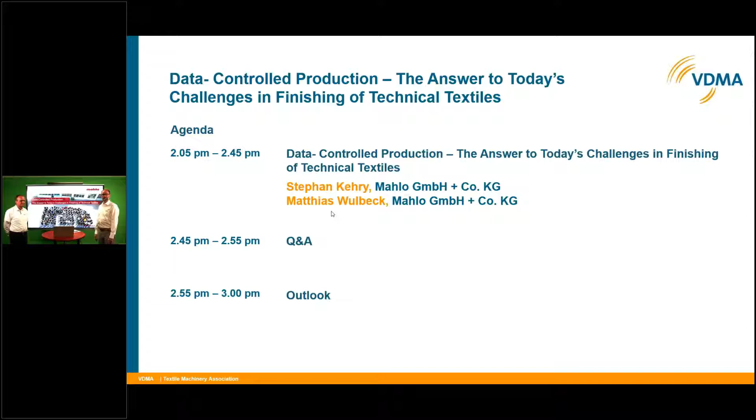Thank you very much, Mr. Bogun, and hello and servus from Bavaria. May I introduce my colleague, Mr. Matthias Wulbeck. He is in charge of product management here at Mahlo for the QMS business, and I'm very proud to have him next to me because he knows everything about QMS. Thank you, Stefan. And my name is Stephan Kehry. I'm in charge of the textile part of the product management, and together we want to introduce this topic about data-controlled production to you today.

But as usual, I think it's well-known business that first we have to introduce Mahlo a little bit, because there might be a few people who don't know Mahlo that well.

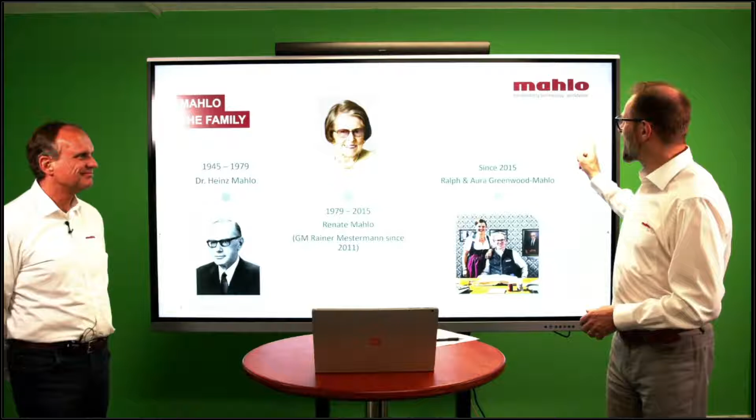Some benchmarks, quite important: in 1948, we already started with process control. It was the first process control in the history of textiles. At that time, it was the measurement of the residual moisture and the closed loop system, which controls the speed of the stenter to make sure that you always have the right speed. Then in '59, perhaps the most important innovation in the history of textiles, the weft straightener, and in '95 we started with the QMS, the quality management systems, and it was so successful that in 2018 we already built an all new production facility for that quality management system.

We have the online measurement and control of basis weight, moisture, thickness, and density. And Matthias will tell you a little bit more about those details. Thank you, Stefan.

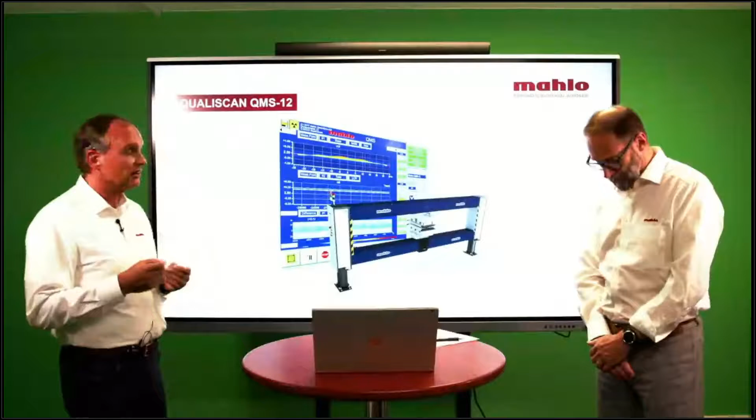So I have the pleasure to talk about the web gauging system QualiScan. QMS is the brand name, and this system works for online measurement with sensors that move over the entire web.

Today we will show you what you can do with it and what the sense of it is. Let's take a brief look at the current political situation in the world. I do not want to lose too many words about it, but the corona disease is still affecting our global supply chains. We have bottlenecks in many machine components, and important for you, in many raw materials, especially coming from Asia. The transportation possibilities are very limited since many harbors and seaports in China and the Far East are still in lockdown.

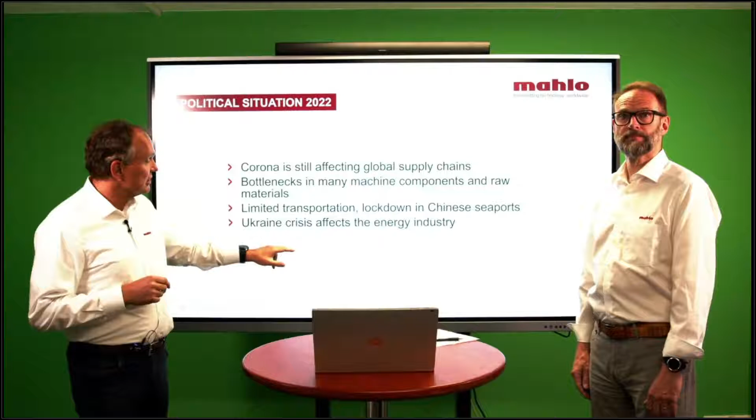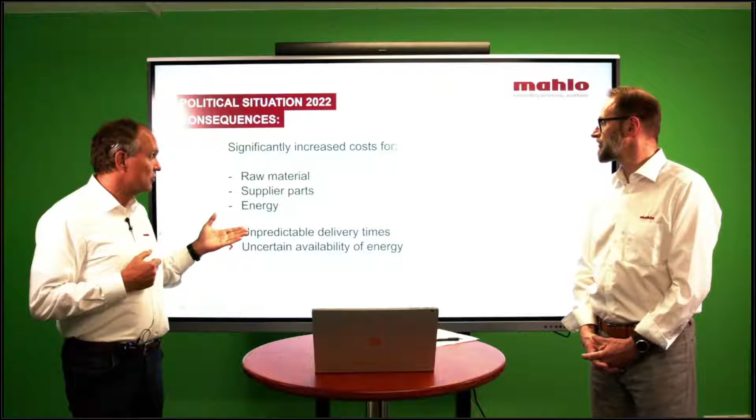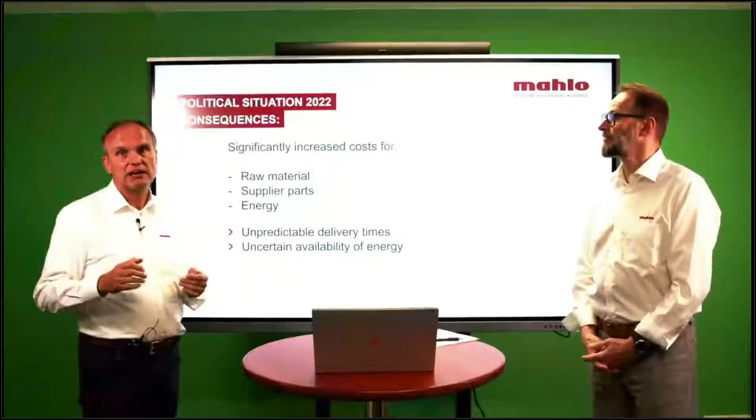And the latest Ukraine crisis affects the energy industry. The result is that we have to face significantly increased costs for raw material and supplier parts, which affects our machine business mainly, and energy. And this is not enough. We have unpredictable delivery times and great uncertainty of the availability of energy in the future. What happens if they cut down the gas supply completely? Nobody knows what will happen then.

So the savings of energy and raw material have always been a very important topic, and it's more important today than ever before. Climate protection, of course, is the biggest issue, but in the meantime we have to consider as well the economic survival of the manufacturers themselves.

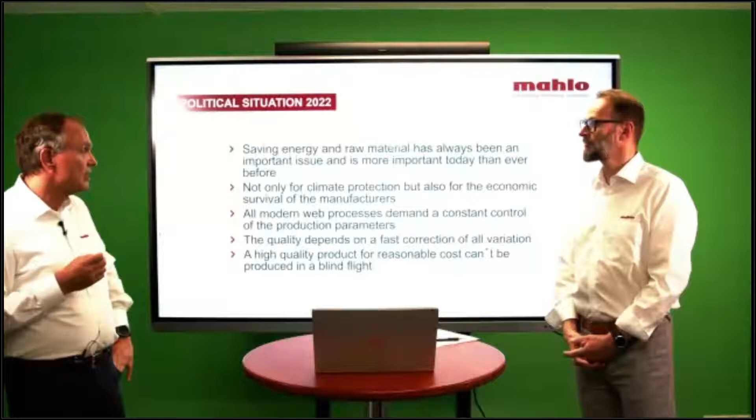For this reason, all modern web processes demand constant control of the production parameters. The quality depends on fast correction of all variation, and a high quality product for a reasonable cost cannot be produced in a blind flight.

What can we achieve with an online quality control? First of all, we are able to minimize the energy input down to a minimum. Another point is that we achieve the product quality with a minimum of raw material. We avoid bad quality and rejects. So we optimize the machine utilization, and we avoid double work and time for the reproduction of the rejects.

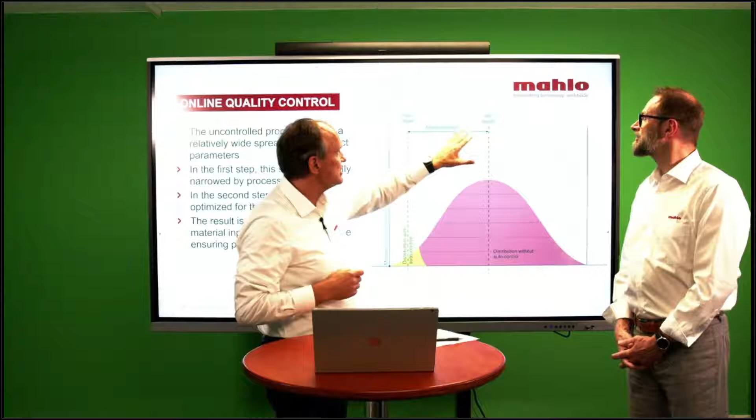And the difference of this is the material that we can save with the active online process control.

An example from the non-woven production: let's think about a needle punched non-woven, which comes from the card and a cross lapper. Here the red profile shows us a very typical situation of an uncontrolled process. In the edges of the web, we have more fiber material because the cross lapper brings more fibers into the edges left and right, and the result is such a bathtub profile, or also called a smile profile, with some big deviation inside, for instance with a CV value of 5%.

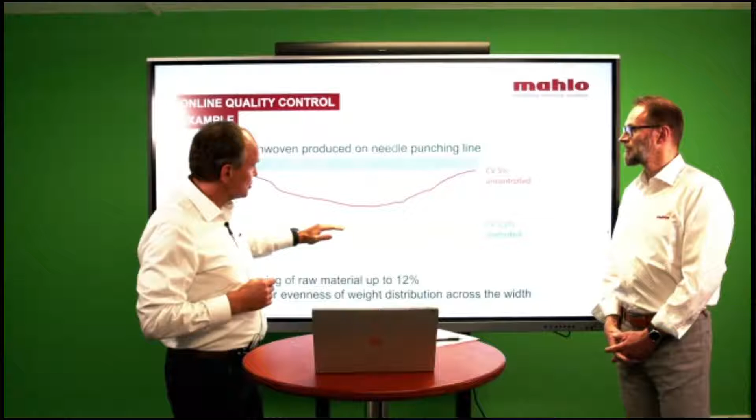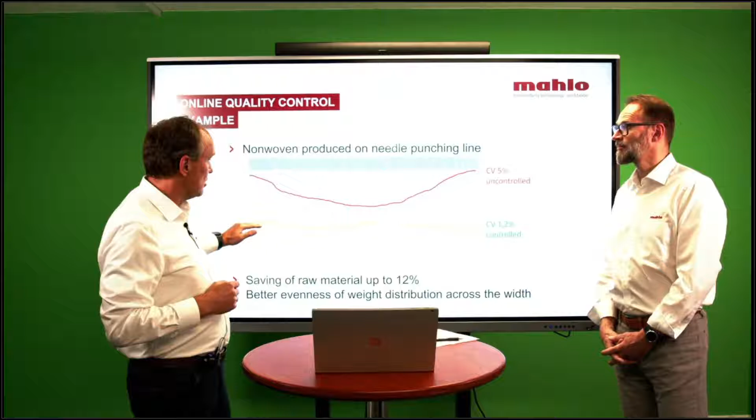By using an automatic measuring and control system, we know the cross profile of the weight very well. We submit the data to the machine control, and we achieve a very smooth cross profile over the entire width with a very good CV value. In addition, we can lower the total target weight value to the minimum, and the material savings go up to 12%. So we have a much better product with high uniformity and high material saving in this case.

Another process is spun lace non-woven, which includes also a drying process. In that case, we typically measure the basis weight profile in combination with the residual moisture after the drying. What does this mean? When we know the residual moisture, we can control the input energy exactly to the minimum. There is no need to over dry the web in case of preventing problems like mold in the final product, so we make sure that our product leaves the machine with the right residual moisture.

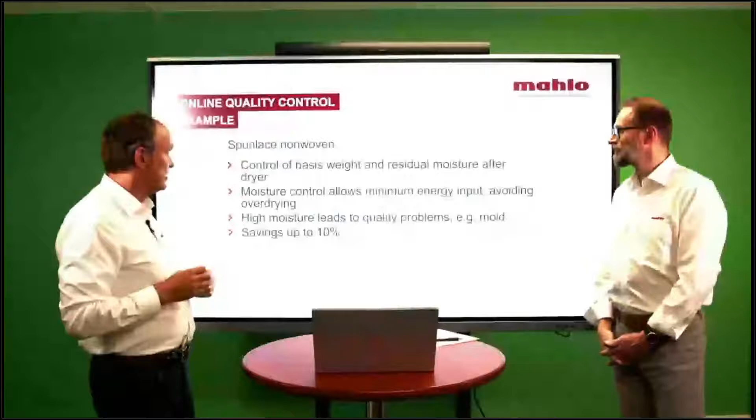And even here we achieve savings up to 10% in energy.

But the most important thing is the sensors themselves. So what can we control, what can we measure online? Basis weight is the most common type of measurement we use, and for this we have beta and X-ray sensors. We offer moisture sensors based on infrared and microwave, product thickness with laser or shadow thickness. For all filter material, we have an Air Permeability sensor in our program, and we can detect single components of the material mix as well.

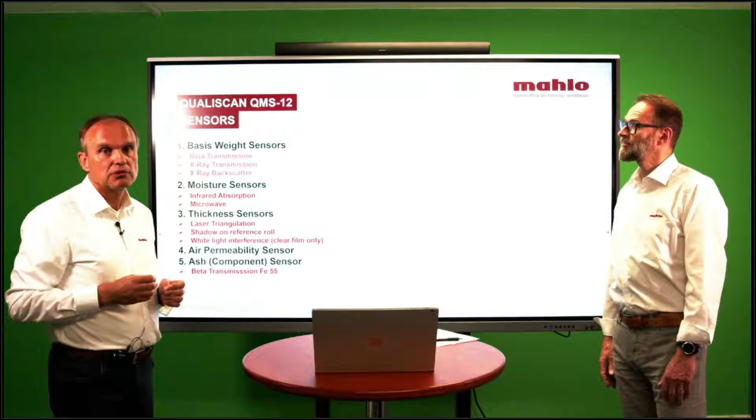Let's go briefly through this selection of sensors used in non-woven industry as well as textile coating, for instance. The most common system is the basis weight sensor based on beta gauge.

This uses a radioisotope, krypton 85 or strontium 90, a very old technology, very easy to handle, and achieving very stable measuring results, but they require radiation safety on site. So if you want to use this type of sensor, you need to have radiation safety officers in your factory, and you must apply for a license to use it.

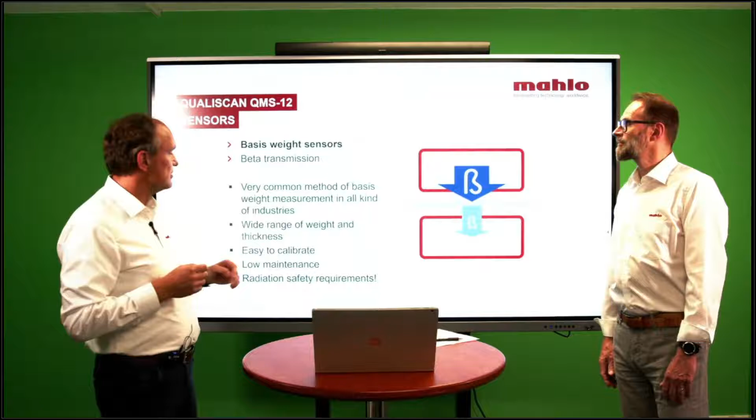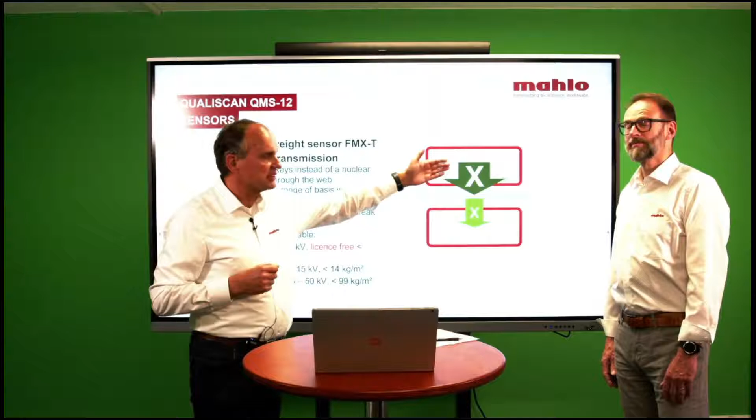So for this reason, many manufacturers are looking for non-nuclear alternatives, and one of them is an X-ray sensor, which works very similarly, but instead of using a radioisotope, we have an X-ray tube in different strengths. The nice thing is the small one, with 5 kilovolt, can be used completely license-free. We must exactly know the weight range, the type of fiber, and so on, and then we can select the right system for you.

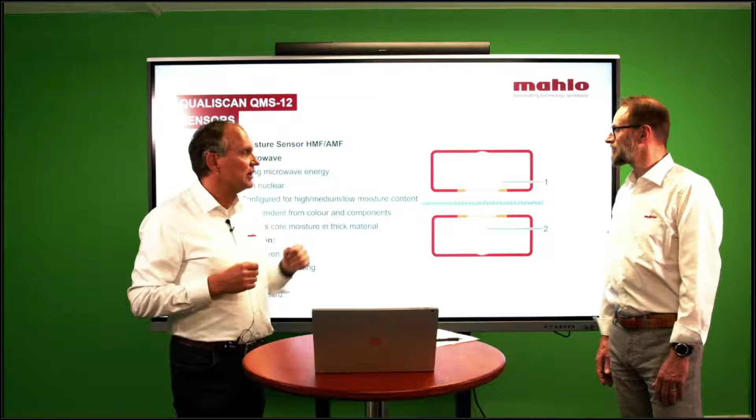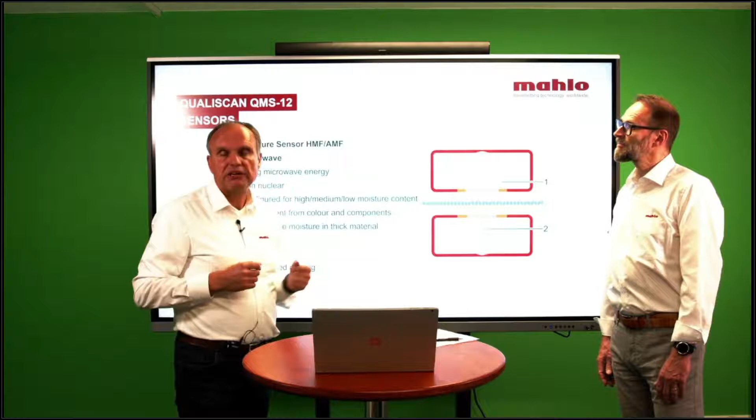For the moisture, we are using two technologies. One is the microwave system, which directly reacts to the water content in the web. This works very well on thick material with high water content, because it has a very strong penetration through the web and is not limited by thickness or weight of the web.

Another technology comes more and more into focus: using infrared light and detecting the absorption of the infrared light at certain wavelengths. On each of these wavelengths, we get a signal for a certain material. So in the most simple application, we measure the water, or residual moisture, at a bandwidth of 1920 nanometers. The infrared light is absorbed at this wavelength, and the signal shows us with very high accuracy the true residual moisture of the material.

But not only moisture can be detected - organic fibers like PET, PE, polypropylene, polyamide, PVC, and many others can also be detected at certain wavelengths. So the infrared measuring system in many cases is capable of measuring basis weight as well, and at the same time residual moisture, just using one type of sensor.

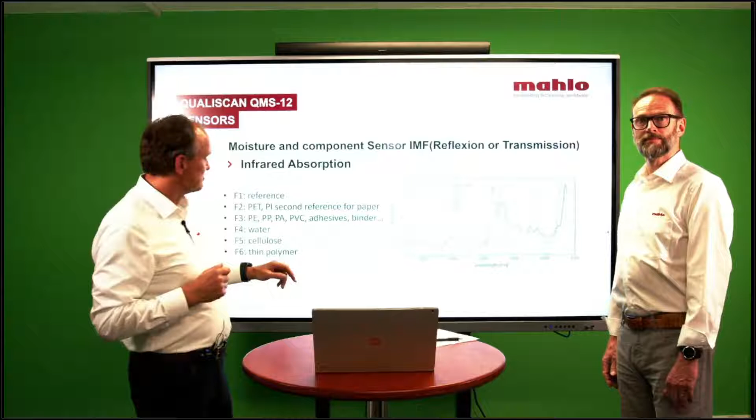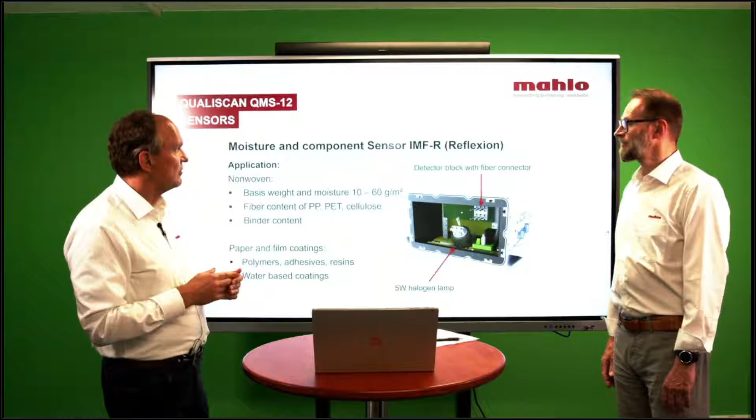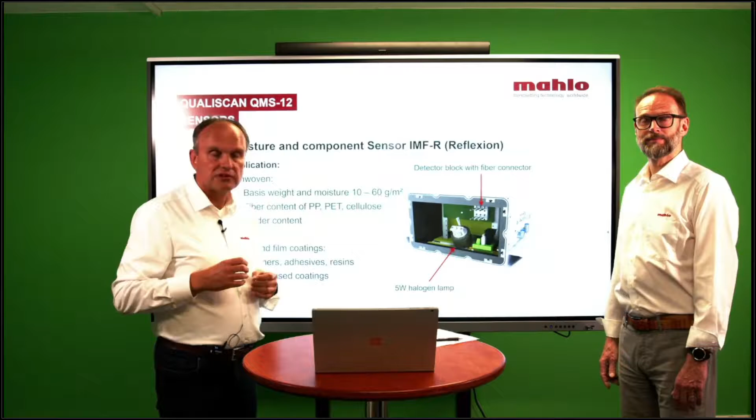The infrared system comes in two different versions. One is working with a reflecting signal, where the detector and the light source are in the same sensor head. This is very good for measuring surface coating - for this application, infrared reflection is a good choice. Or, if you want to penetrate through the web for residual moisture, for instance, we have the same system in transmission measuring mode.

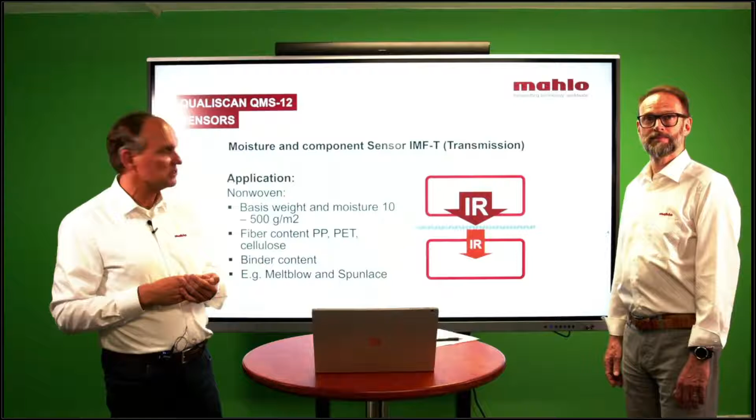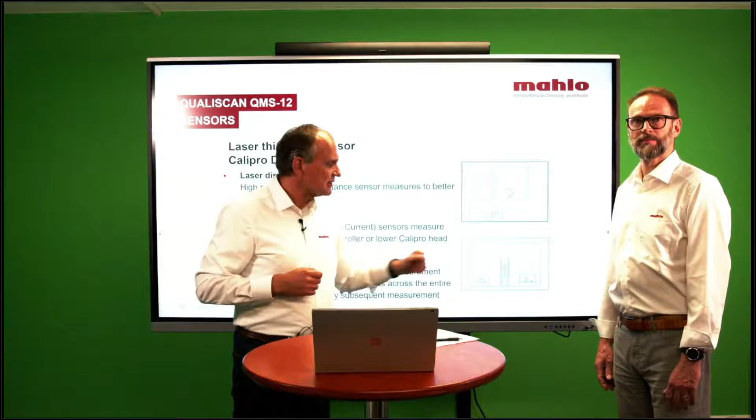The thickness can also be detected in different ways. One system is a combination using a laser sensor for measuring the distance to the web surface, and a second sensor measuring a distance to a metallic reference.

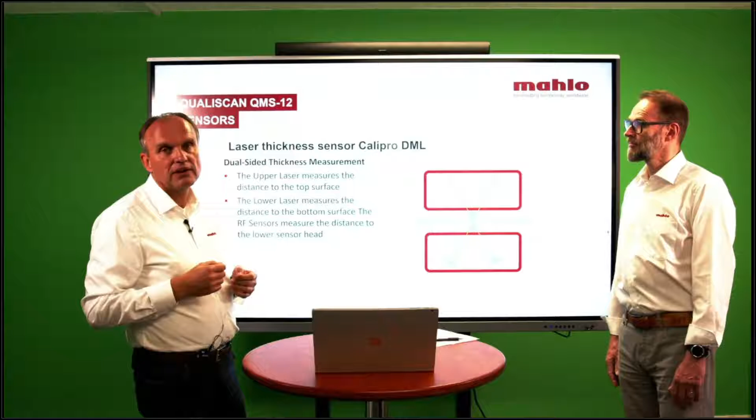When we look at this sketch, we see a double-sided laser thickness measurement. One detects the distance to the upper surface, and the second the lower surface. A radio frequency sensor tells us the distance in between the sensor heads themselves. This is a non-contacting thickness measurement with quite high accuracy, very often used in nonwoven applications.

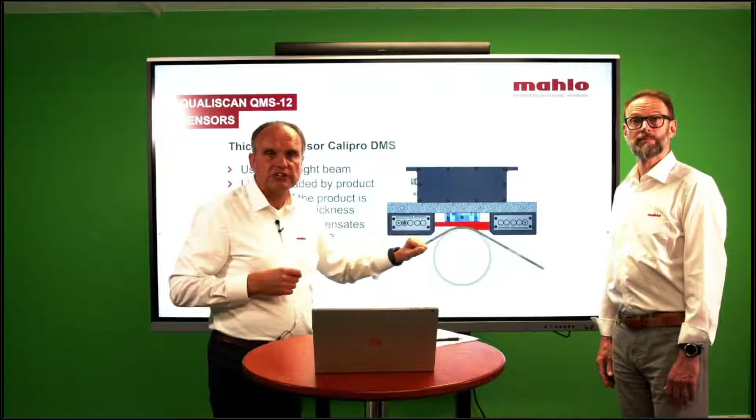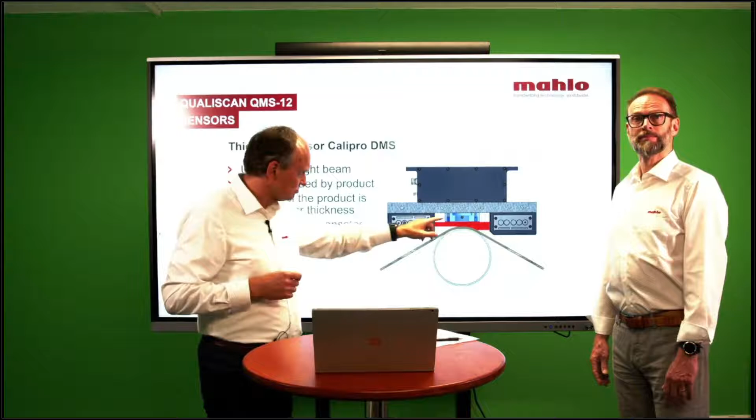An alternative is using a reference roller, with the web running over it at a 60-degree angle or more. Instead of a laser, we use an LED light sent over the shoulder of this roller, and the width of the detected light is our signal for material thickness. Here too we use the radio frequency sensor to measure distance to the reference roller itself. The benefit of this system is that it is not affected by a very uneven or open-structured material surface.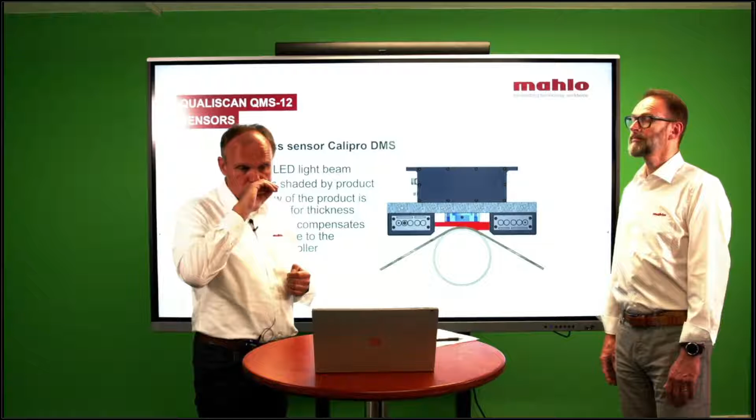Here we see a combination of a basis weight sensor plus a thickness sensor. In this example, we have a measurement of basis weight and thickness at the same time, and we can also calculate the web density in this case.

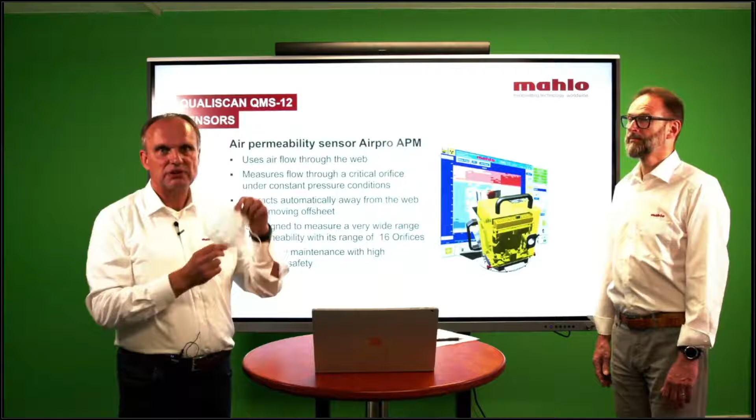Last but not least, for our non-woven and technical textile products, it might be very helpful to know the air permeability. In the last two years, we were all affected with a certain product that everyone knows very well, and here we can imagine how important it is to have good air permeability, so it makes it more comfortable to wear these things. But not only for face masks, but for industrial filters, liquid filters, air filters, and so on.

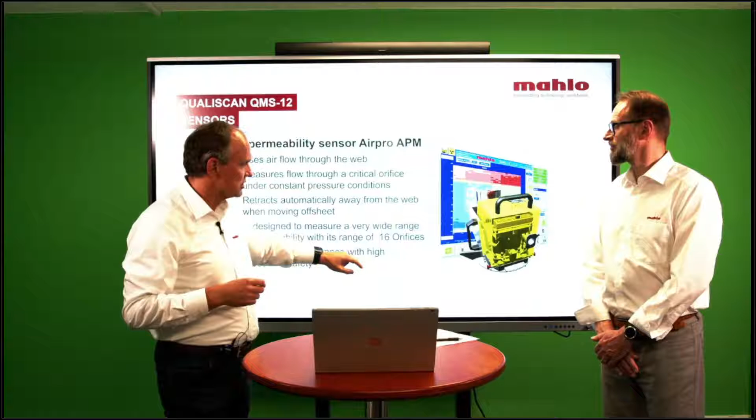We can use an online air permeability sensor, also in combination with all other types of sensors like weight, moisture, thickness, and so on. Here we see a system. In this crosscut, we have the Mahlo scanner with an included basis weight sensor, and here we have the air permeability sensor that works with a vacuum, taking the air through the web and determining the air permeability.

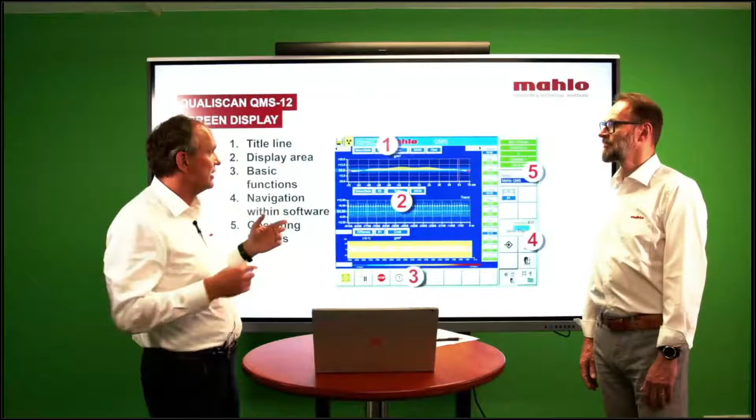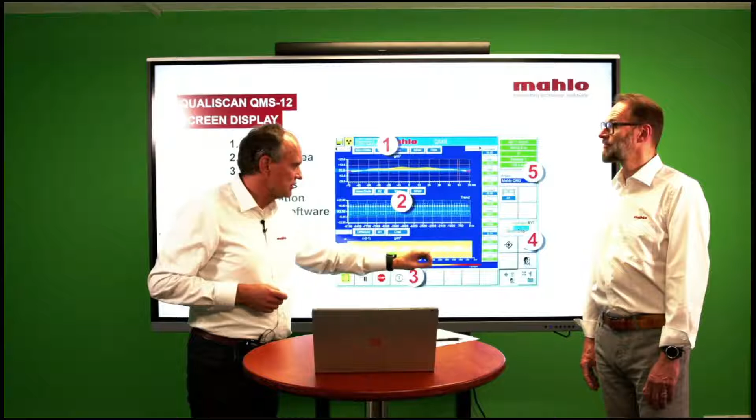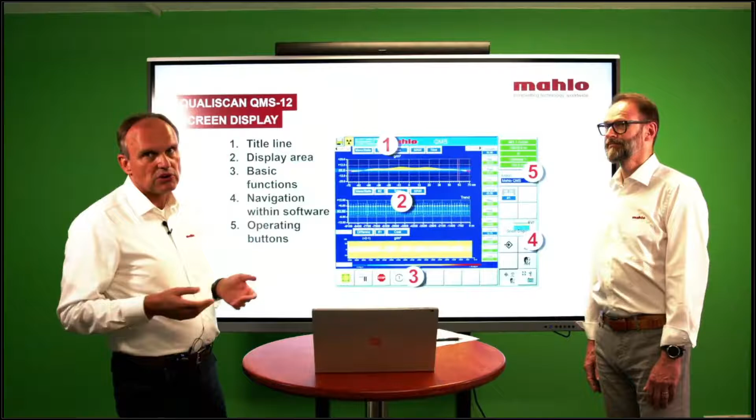What do we see on our video screen? With a very quick look, we see immediately the situation of the cross profile. Are all our detected values inside the tolerance range, or are they exceeding? We see the trend in the length direction and also in a two-dimensional heat map with color shades, which immediately informs us about the situation of our product in the length and cross direction. All maintenance is done on a video touchscreen, so there is no keyboard and mouse and so on required.

What do we do with all the data the system is collecting? One interesting option is to put all this data into a short quality protocol. So we can get this for each roll produced, and even here we see over the entire length where our detected values are.

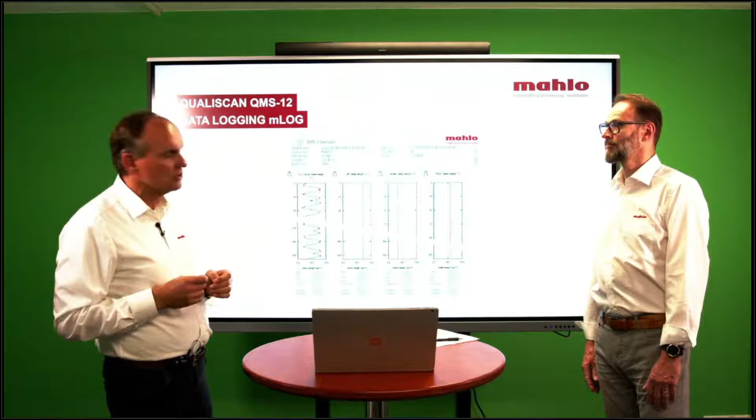If you like to have it more detailed, we can also use a data-based system, and there we have the possibility to dive into this ocean of data and pick out each single piece of information. Stefan will give you later on a nice overview about this system.

And all the data can be communicated with the process control of our production line. We can get and send data with all typical interfaces like Profinet, OPC, Modbus, and so on. So the production line always knows the quality produced and can take its action to increase the quality and to lower the energy and raw material input.

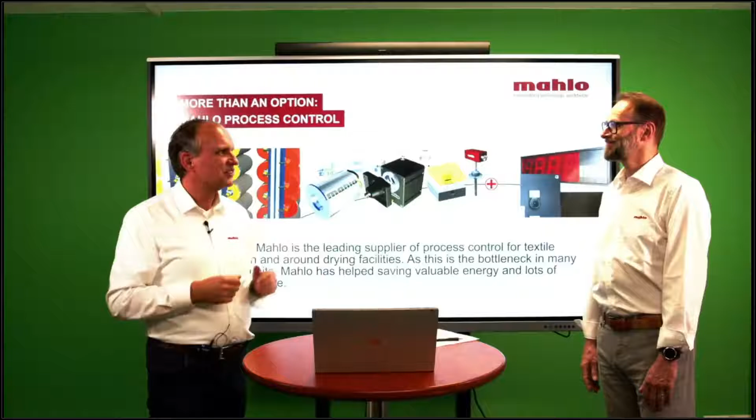And I want to take you now into this interesting and exciting field of textiles, which is also and in particular important for all the technical textiles out there. Why is it so important to have process control during all those textile processes?

Simply because we are talking about bottlenecks. If you are having a bottleneck, and everybody has a bottleneck in production, you have to make everything available and possible to extend that bottleneck. Because this bottleneck, gentlemen, this bottleneck defines the pace of your production.

This bottleneck dictates whether or not your bleaching range, your mercerizing, your dyeing machines are producing at the pace that they should. Most of the time we are talking about a stenter here, the drying machine, because all the wet processes have to be dried in order to pass on to the next process.

And if you don't dry enough fabric, then of course you don't have enough fabric for the dyeing at the padder, or all the fabric which is piling up, already dyed, waits to be dried. So it is absolutely unnecessary to put that much into the dyeing machines if you're not able to dry it.

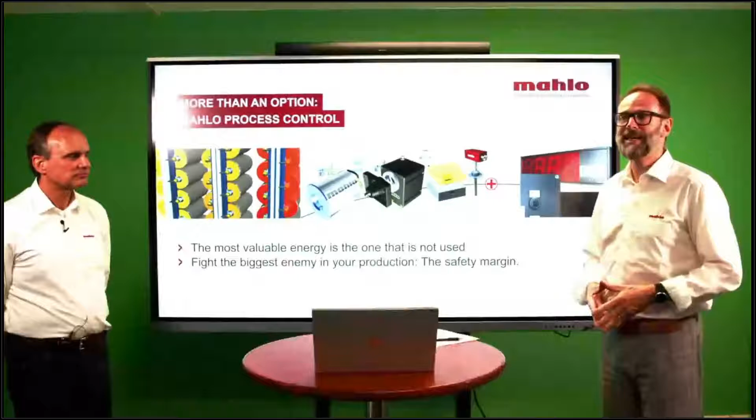So having all that said, the bottleneck of production needs to be looked at and controlled in order to maximize and optimize the entire production of your company. So if we're talking about that, the best energy, the cheapest energy, and the most valuable energy that you can have is the energy that you don't use, that you save. And another topic is also quite important, and this is the safety margin.

If you are not sure about the capabilities of your machine, and if you don't control it to the extent needed, what do you do? Of course, you go a little bit slower, just to make sure that the fabric is really dry, or that the heat setting is really reached. So in order to ensure the quality of your product, you slow down the entire process.

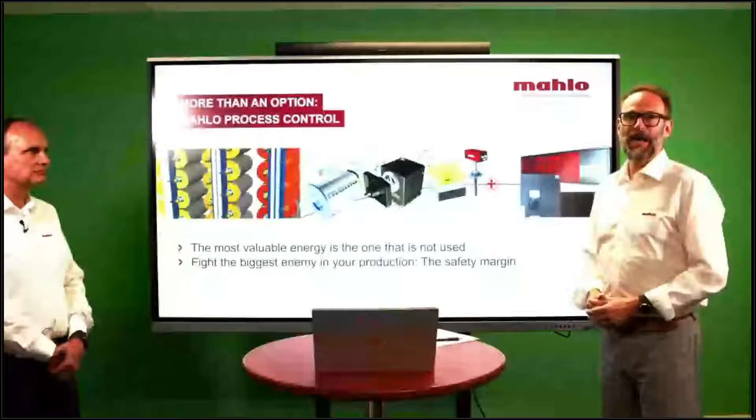Which is on top of it real poison for your production. So we are actually solving two subjects with one solution. This safety margin might sound quite good because of course you ensure the quality, but it steals your production, it steals your efficiency. And on the other hand, of course, you are just boosting your production by opening up the bottleneck.

This is what process control will do for your entire production. And on top of that, it ensures quality, because there is no gray zone anymore. There's just either a wrong or a right, and Mahlo is the synonym for right production.

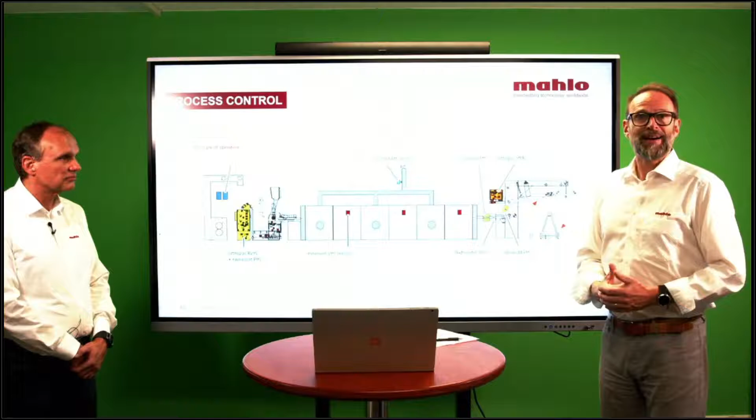So let's just dive in. This is a stenter, and you see already there is the weft straightener, there is the heat or the temperature of the surface that we can control. There is the air inside the stenter that we can control, and the fans which are linked to it. We can control the weight of the fabric. We can control the residual moisture, which is also very important. And then, of course, we can control the distortion, which is actually the most important thing.

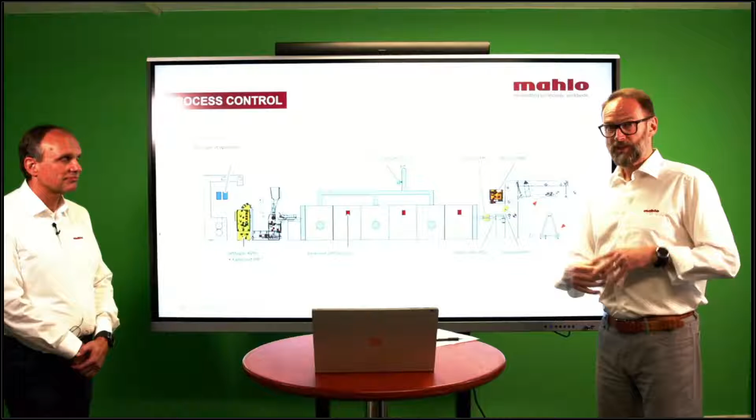And in an earlier web talk, we said that there's no excuse for distortion anymore, and this is why I want to start with it. Mahlo definitely has the widest range of sensors to detect distortion.

We have an optoelectronic system, we have a camera-based system, we have a PCS system which is controlling the pattern. So whatever is needed to rule your production, you can be sure that we have it. All you have to do is talk to us and we will find the right solution for you. We don't have to take what we have, we can really take what is best for you because we have such a wide range of different sensors in our portfolio.

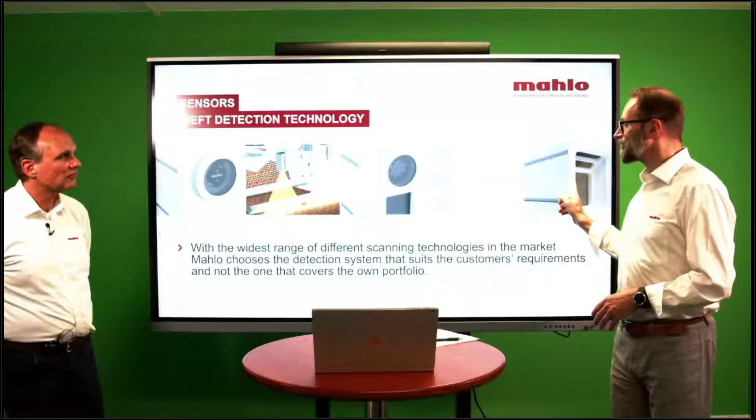We also have on our website a lot of white papers which are quite interesting, so just dive through the website and you will find some knowledge about the scanning systems and other important data which might help you solve your problems and sensitize you already to the different issues that might occur in conjunction with weft straightening.

Another thing that comes into our thinking when we talk about scanning is the scanning mode. As Matthias said early on, we have traversing systems in the QMS for nonwovens, and of course we have our traditional and well-known fixed sensors which are looking at some areas of the fabric side by side. We have had a lot of talks about using those sensors as well for the textile industry.

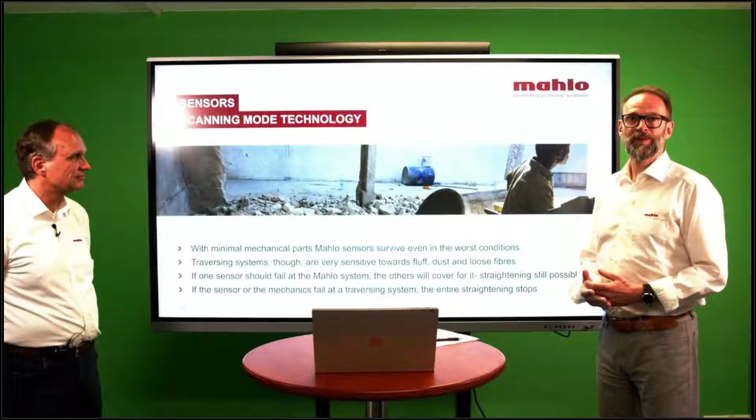However, we know very well how those industries look. It is sometimes a very unfriendly environment. In most cases, it's an environment which is totally poisoning for sensors which are traversing. And no matter what precautions you take, it is always affecting all the moving parts. And if you have just one sensor which is traversing, and this sensor or the traverse stops, then you have nothing, you are blindfolded.

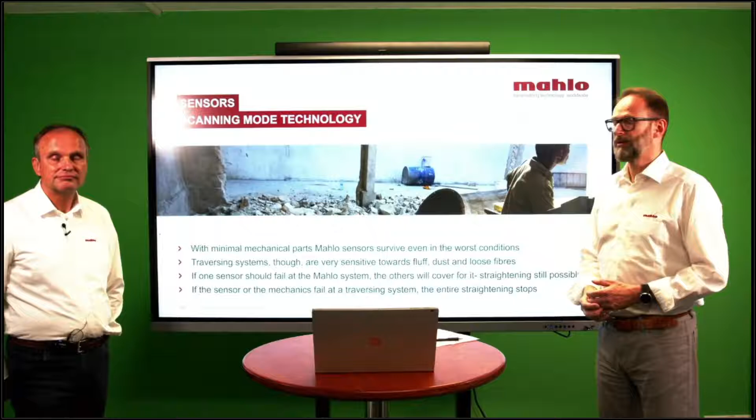This is another advantage that we have when we have 4, 6, or 8 sensors side by side. If there's one sensor which is not working for whatever reason, the others will cover up and you can still run your production with the residual sensors. This will not happen if you just have one sensor traversing from one side to the other, 24/7 and 365 days a year. So it's just a matter of safety and security to have a fixed sensor installation like Mahlo has had since the beginning of weft straightening.

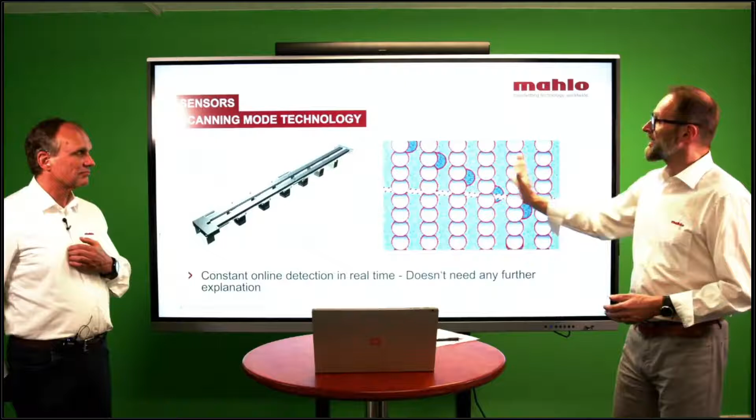So this is the case, this is how it looks like. We have this number of sensors depending on the working width of the fabric, which is defined for the best scanning, and everything else is actually just pure logic. It goes without saying that these data points are collecting much more data, and are more correct and precise than any other system. And I think the amount of systems that we have sold in the last decades also speak for themselves. Another thing, of course, is the well-known closed loop control.

Together with the university here in Germany, we have worked out and developed software which can predict the future. So you will not get the numbers of the lottery for next week, but you can already see how a detection will develop in the near future within the next second.

So what that means for your weft straightener is quite clear. The mechanics don't need to go to the extent because they know exactly when the distortion is coming to a stop and the software is telling it, it can already stop early on. That means you don't have to spend so much energy in the distortion correction. On top of that, the mechanics are not under such high pressure as without that software, and that means your wear and tear and maintenance efforts will go down as well. So with that software, you will save a lot of money on top.

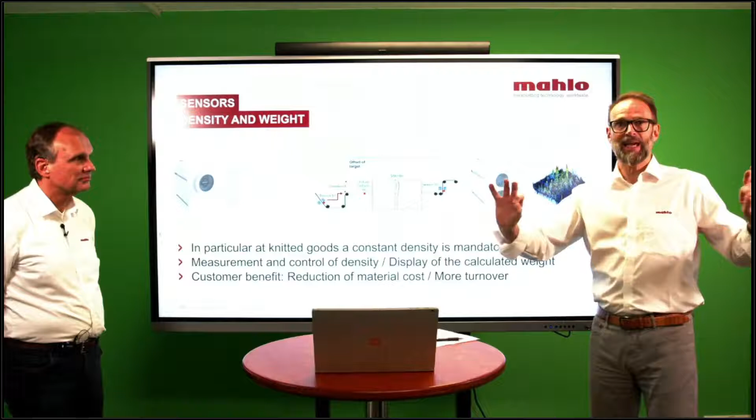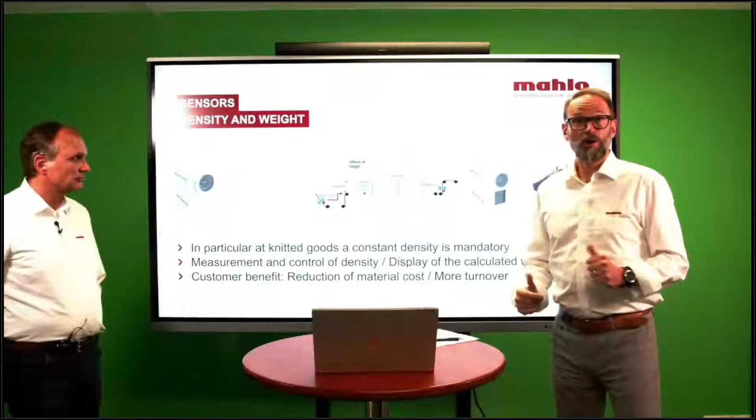Talking about the sensors, another thing we do is control the density. At the entry of a stenter, we can count precisely every single thread, and together with the speed of that system, which gives us the distance and the meterage, we can exactly tell the density of the fabric. Just keep in mind how much brutal force is coming towards a textile good, from the weaving or knitting to the finished goods - so much stretching, mechanical and thermal force, and all the chemicals - it's a very big thing happening with these textiles. Here we fix it by controlling the overfeed according to the numbers we've detected with that sensor.

So that means the density will always be the same when we have such a density sensor, the pick counter in front of it. And in back, we have another sensor specialized for that particular purpose - a camera-based sensor, not optoelectronic like the one best for the front. Here in the back, we have a camera-based sensor because we want to see the full picture, not only the single threads. Here we really want to see the total fabric from the top to calculate the weight.

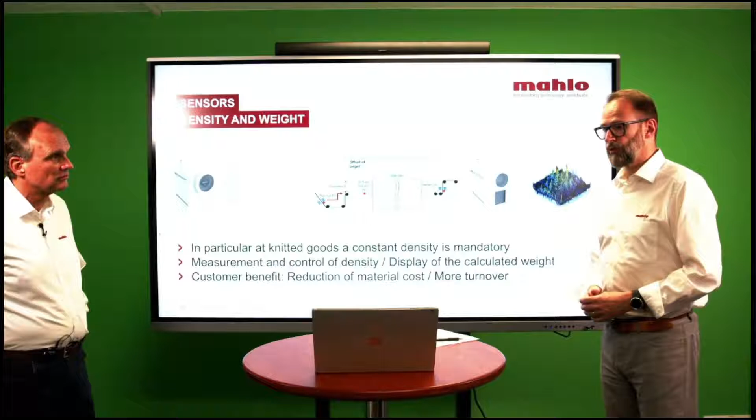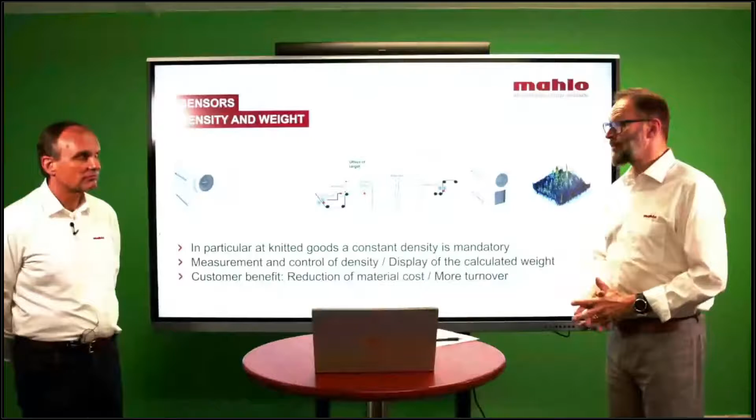So if we have the weight of the single threads, here we can combine the weft and the warp, and we can give you a very good indication about the weight, which is quite important for the calendering or packaging, compared or in conjunction with knitted goods, for example. So this is something we also can provide in terms of process control.

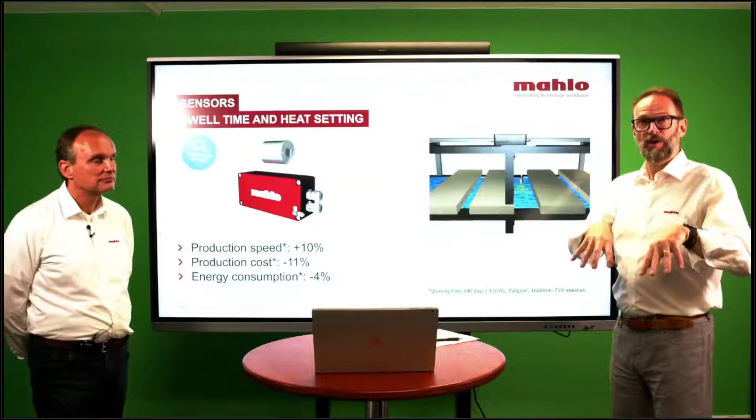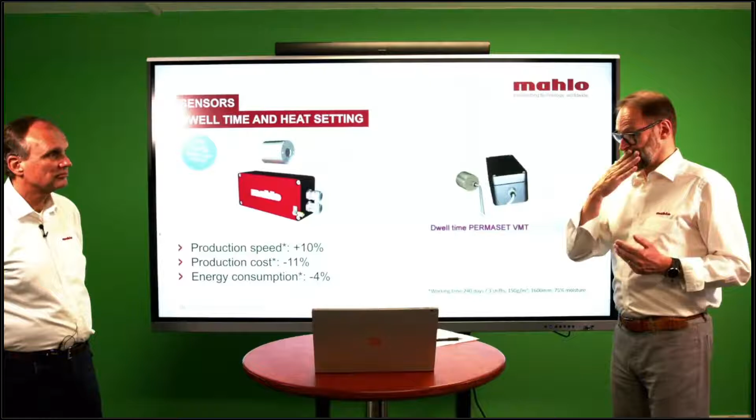Another thing where you can already save 10% of your production is the dwell time and heat setting. Here we look to the temperature of the surface of the fabric, which is quite important, because if you start a heat setting process, you need to know when it starts - at the beginning you only have the temperature of the condensated moisture, and only when it reaches the temperature for heat setting do you start counting the time to finalize the process correctly. Again, we're fighting the safety margin, because you don't have to wait 1.5 minutes if you only need 1 minute, when you know exactly when the heat setting starts, exactly at that temperature. Like that, you can increase your production by 10%.

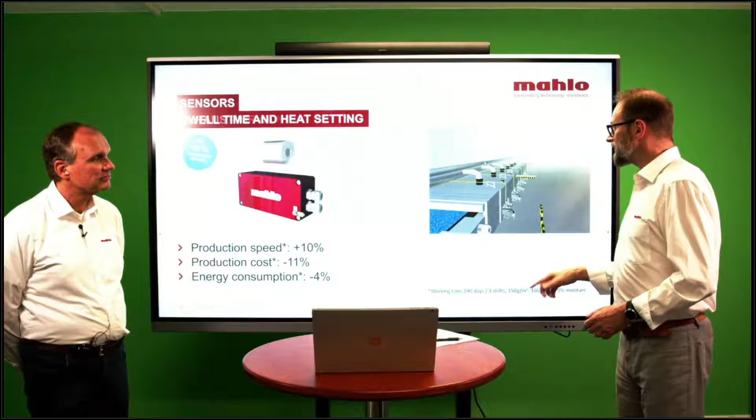This might sound little if you are looking at the meterages - instead of 30, you run 33 meters a minute - but just calculate that number, that amount, over the annual production of a stenter. This is really already something that might help you in the turnover and the numbers of your financial background at the end of the year.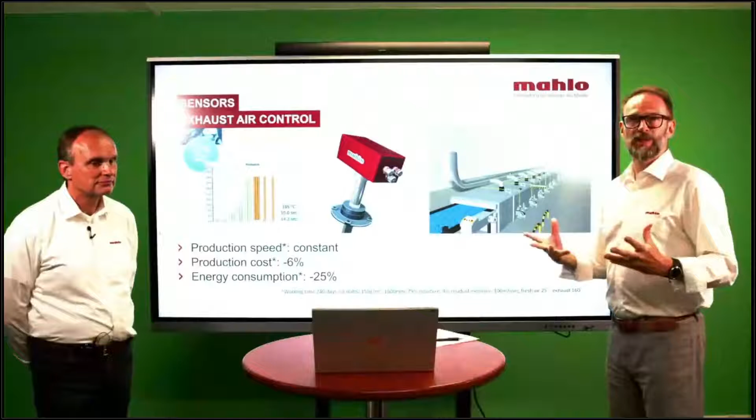Another thing is the exhaust air control. Here we are actually fighting two things with one sensor. If you look into the process of stentering or drying, we have all the energy needed to get the moisture out of the fiber. But this is only one part of the story. The more important part is how to get that moisture out of the system, because if the system is filled with moisture, saturated, then you can't get any more moisture out.

As important as the drying itself is the fan which transports the moisture out of the system. So this fan normally runs full throttle just in order to get as much moisture out of the system as possible.

But together with this moisture, we also have temperature. This moisture is hot, hot, hot, and this energy should remain in the stenter because energy is needed there where it should be hot. So finding the right balance between the hot moisture and the space for new moisture is the art we are looking at, and it saves two things.

First of all, we are getting the right temperature with much less energy. It saves so much just by keeping that important, very high temperature moisture inside. And on the other side, perhaps even more important these days where electricity is rising like hell, the fans are not always running at full throttle. They are controlled to the right speed to get just enough moisture out, leaving enough space for the moisture coming back, without running too fast and losing the hot moisture inside the stenter. So you save first the electricity of the fan, and secondly all the energy needed for drying the fabric.

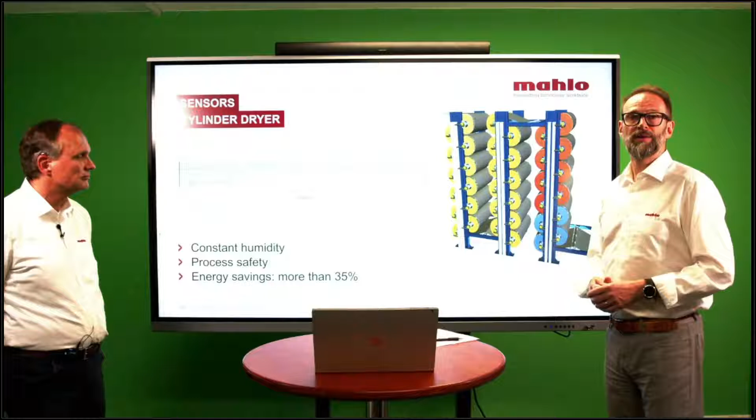And here we get savings of more than 35% in energy. And again, we guarantee a very stable and constant residual moisture, which avoids things like different moisture levels and different pickup during a padding process.

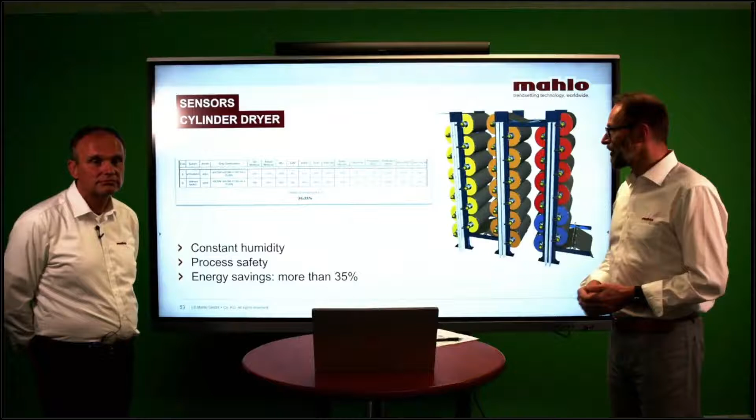As well and as important as the machines and sensors are, so are the operators. If you have an operator who enjoys and understands what he's doing, it helps a lot. We have very intuitive, application-oriented and adjustable controls. We asked a lot of operators how we should design it, and took all that information into our systems. So it's very intuitive, and a lot of people said Steve Jobs copied us when he invented the iPad, but I think they're not right.

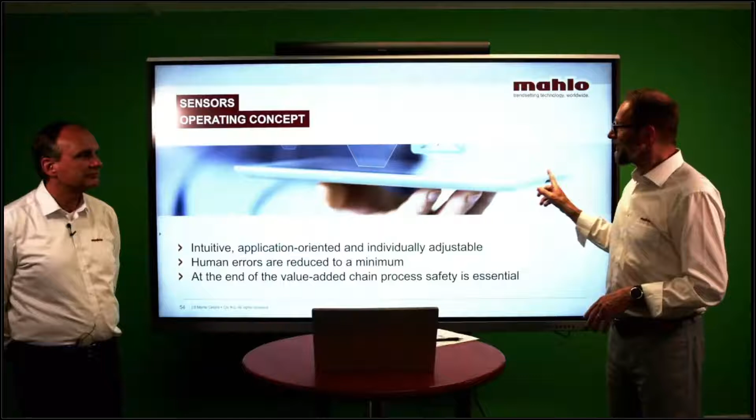However, it is very important that we have this operating concept which allows a good, understandable operation. But it's equally important these days to have the right tools to get the data to the necessary steps. The importance of the Internet of Things and Industry 4.0 is so high that we've really put a focus on data transfer, because data management and collection has been our DNA for decades. Taking that data and transferring it to the necessary steps is new, and we're quite proud that we've been at the very front row of data management systems in the textile business.

That's to increase transparency inside and outside. You need that data to improve - constant improvement is absolutely important if you want to survive these days, and data helps you. You need that data to control not only the process, but also the people and other linked factors. So it's important to collect that data, to speak with data, to manage by data these days. The other thing is to have closed loop controls, so all adjustments are made and you can ensure target values.

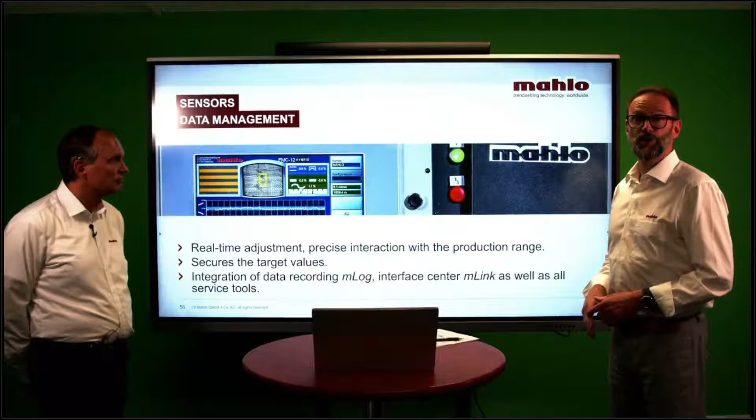The mLog system that Matthias talked about earlier is not only a collection of data, it also helps you get hold of that data quickly and with high security. In the mLog enhanced system, we even have two big hard disk drives sitting next to each other. So if there's a hard disk failure in your production, the other hard disk takes over automatically, ensuring no single bit is lost. You can always rely on the data being secure, collect it for decades, and retrieve it according to a very smart system.

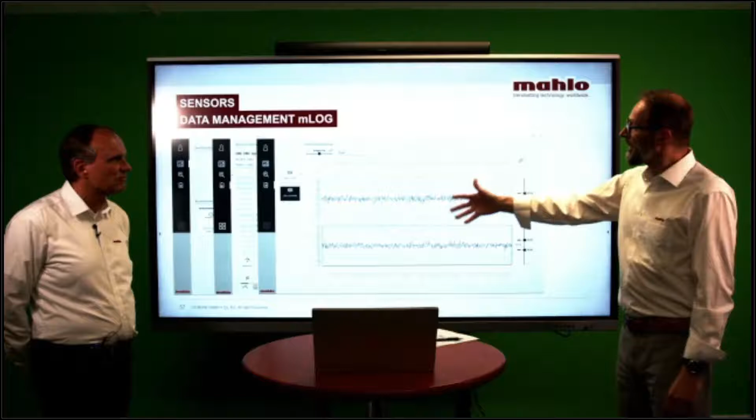So here you can look at pick counts, density, weight, moisture - whatever is needed - at every single minute of production, way back. You can look at the operators during night shift. This gives you very good transparency about every process in your production.

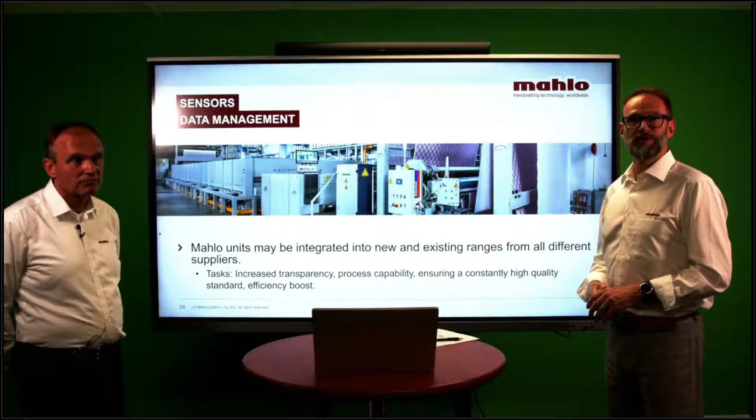It's also important that all our systems can be very easily integrated into every single existing production unit. With these systems, you can easily and quickly upgrade any system into a very innovative and sophisticated one, even if it's already a couple of decades old. Just speak to us and we can give you a good indication of the right steps. As said earlier, we have the right interfaces to connect you everywhere in the world.

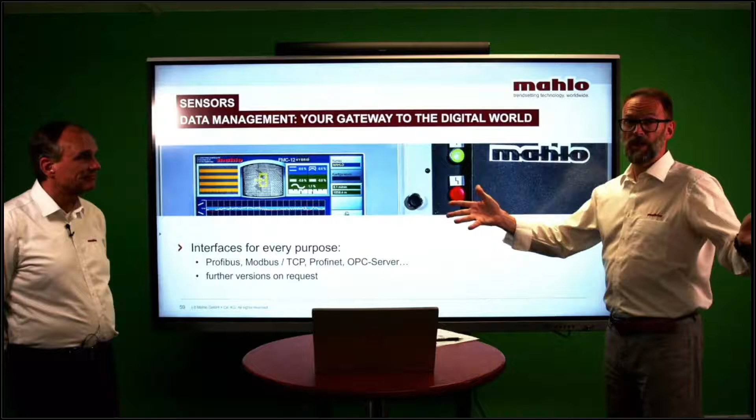And yes, of course, we also have good service. If you're not linked to all the service stations worldwide that we have, you can also collect all the data either from our webpage or directly from us with TeamViewer and direct access to our machines. So this is also possible remotely.

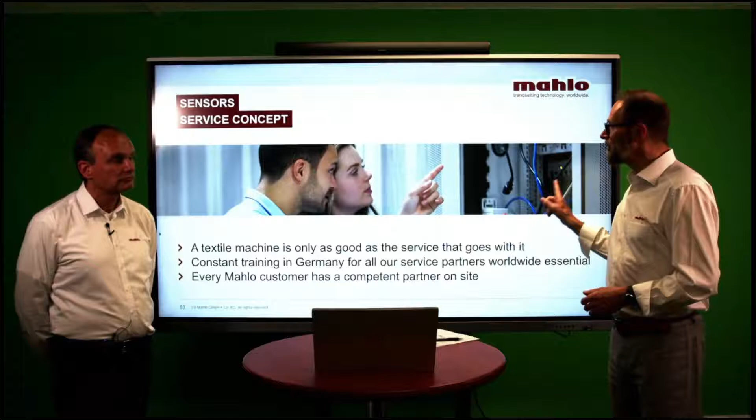I think to give you some room for your questions, if there are any, I will finish now and say thank you very much for your time and interest. I hope we could inspire you to think about your production, to be more process orientated, and to improve your overall production in terms of quality control. Thank you very much.